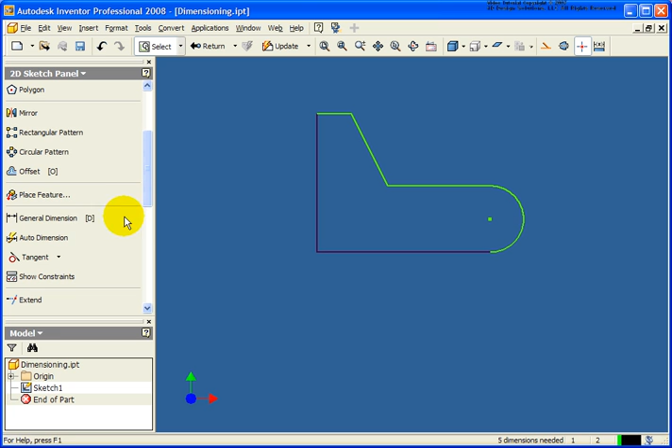In this lesson, we will be covering Autodesk Inventor's dimensioning capabilities in a 2D sketch environment. The file that I have open right now is the dimensioning.ipt file, also found in the Chapter 2 exercise file folder. With Autodesk Inventor, we're pretty much going to be working with a single dimensioning tool. As you can see here, it's called the General Dimension. The shortcut is the letter D. And those of you that have AutoCAD experience, you'll see a lot of similarities here.

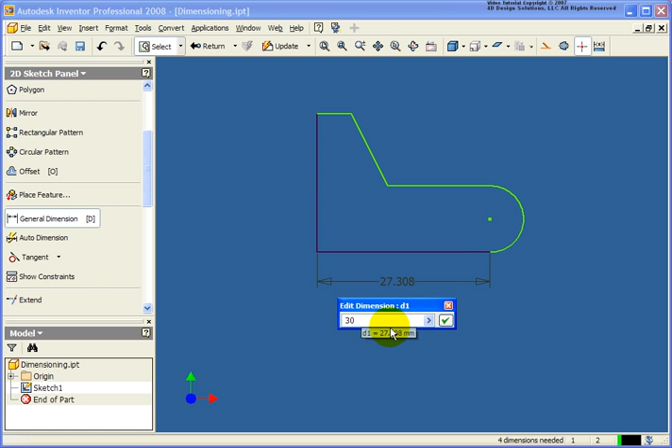I can simply select the edge and then pull my cursor down. And in this case, I will pick on a point to place that dimension. And then with the parametrics in place here, I can type in a value. Now, the dimension appeared after placing it for me to change it, and that's an application option.

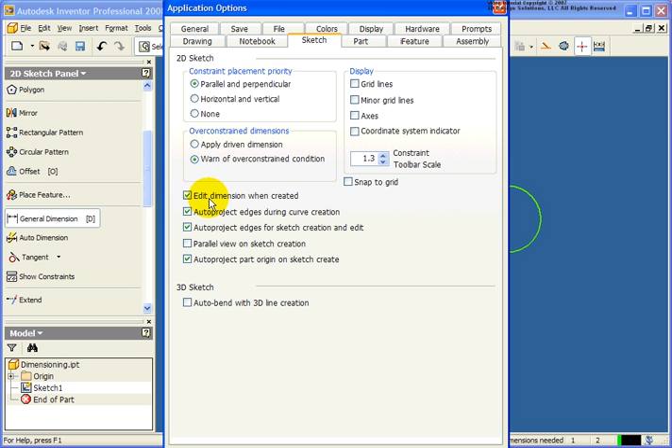Under the Sketch tab, the Edit Dimension when created, that's off by default. So in this case, that dialog box would not have popped back up. I would have had to double click on that dimension to change it. So I would suggest changing the option here to have that checked.

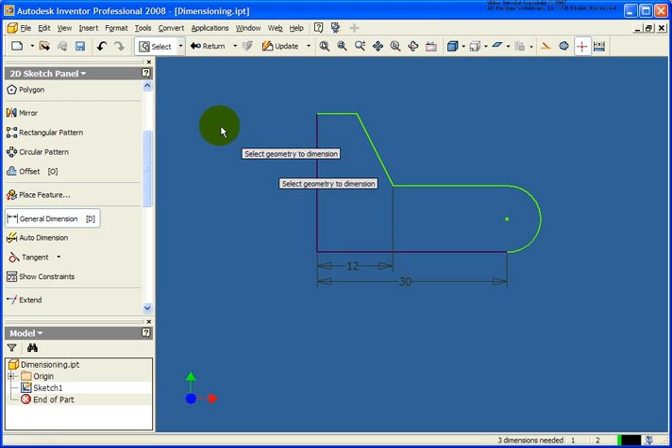Let's take a look at some of the other capabilities here with the General Dimension tool. You can also pick on points. But you'll notice what I'm not doing is I'm not having to use object snaps. Inventor is intelligent. It knows exactly what I want to do by selecting on those given points. So let me undo that one last time here. And let's pick those exact same points.

So just like AutoCAD, if I move my cursor to the left, to the right, to the bottom, Inventor's always suggesting what and where that location is going to be. So in this case, let's place that at 10.

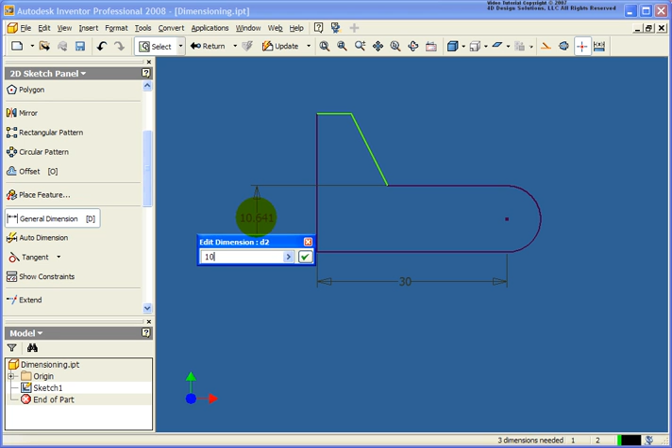So let's place another dimension. I want to place an aligned dimension. So if I select on the angle line that I have, and as I pull the cursor up or to the right, I'm getting horizontal and vertical dimensions. If I want an aligned dimension, I can either right-click and click on aligned, or I'm just going to hit the escape key and do that again and show another method here.

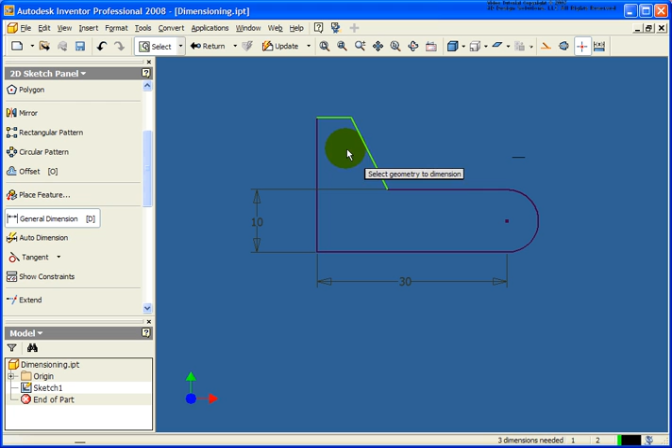If I again select on that angle line, you'll notice I'm getting horizontal and vertical. I'm going to select on that exact same line again to get the aligned dimension, so I can change that value to, in this case, say 14.

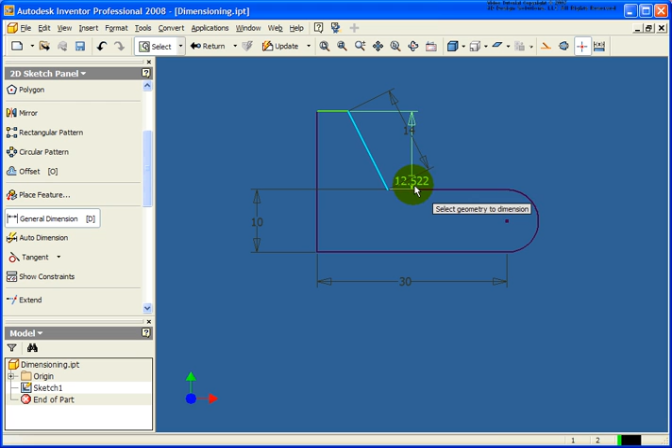To place in an angle dimension, I'm going to select two lines, and you'll notice here this is where a lot of people kind of get a little confused, because right now Inventor is displaying, in this case, a vertical dimension. But keep on moving the cursor down, and you'll see that the glyph changes, showing that if you pick on that, you're going to get an angle. So now, depending upon where I move my cursor, is how I'm going to define that angle. So in this case, I'll just put it right up here and change that to 120 degrees.

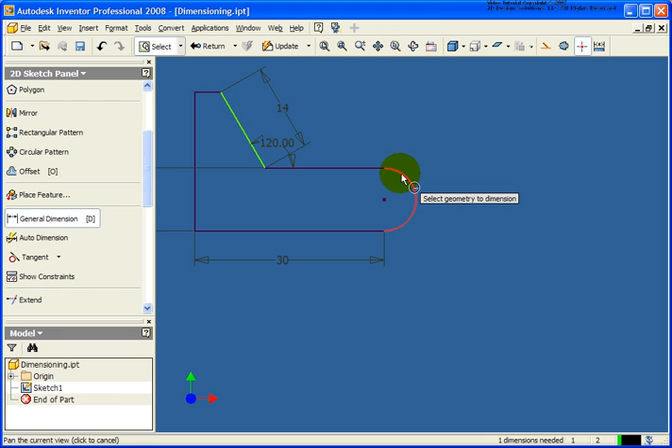To dimension an arc, in this case, I'm still in the same dimensioning tool. I'm going to select on the arc, and by default it will be a radius or a radial dimension. If I want that to be a diameter, I can right click and change that to diameter. So in this case, it's telling me that that dimension is already locked down by another value, so I'm going to go ahead and click on cancel there for a second.

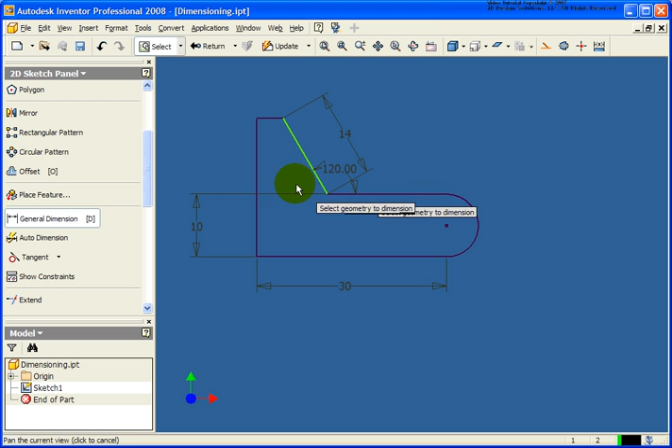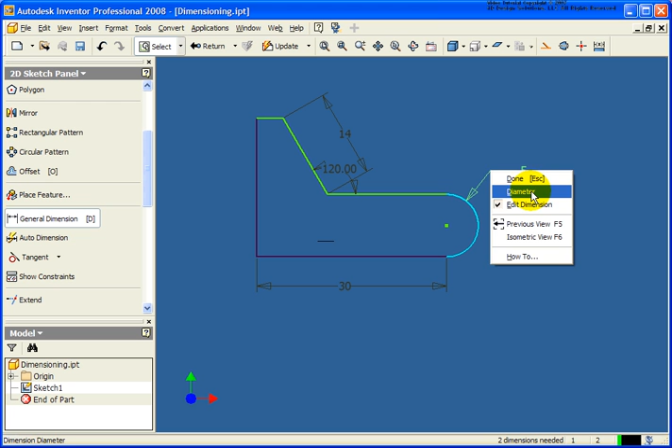And let's remove the 10 millimeter dimension that I had and just hit D from the keyboard and replace that dimension again. The key here with the menu, changing it from a radius to a diameter, that needs to be done before the dimension is placed. Once it is placed, you'll have to erase it and replace that. So in this case, if I really do want that to be a diameter, change that back to 12, and everything is good to go.

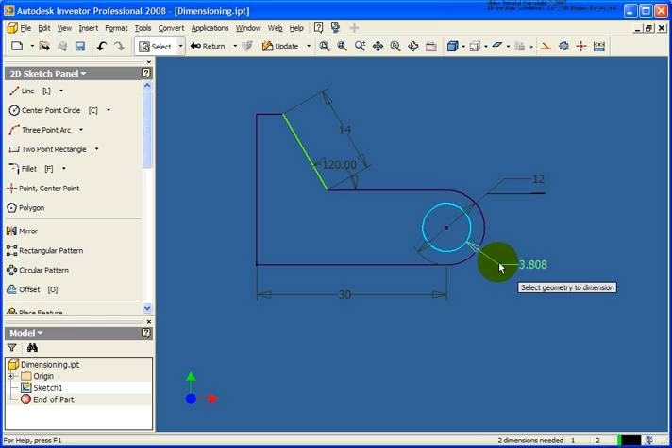Let's just quickly draw in a circle, create an island. And if I place in a dimension again, hitting D on the keyboard, you'll notice that the dimension for the circle will default to a diameter. And of course, I can right click and change that to a radius if I want to. So I'll change that back to diameter. Let's place in a value of 8. And the circle is dimensioned. So I'm going to go ahead and erase that dimension.

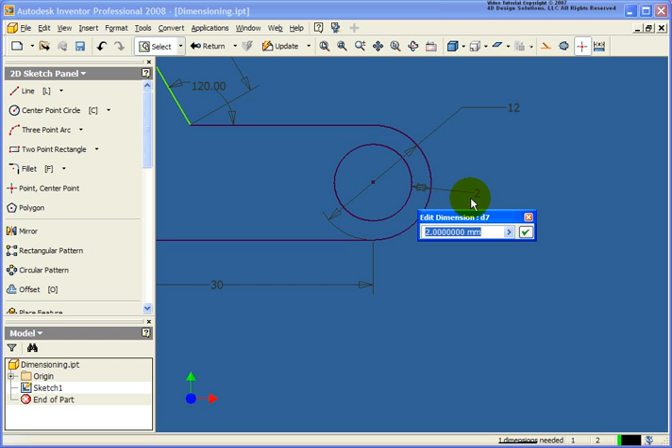Now, maybe I want to go back and I want to control the wall thickness between the arc and that circle. So again, I'm just going to hit D from the keyboard, select on the circle, select on that arc, and I'm now going to define the distance between both of those. Let's change that back to 3. So there's a whole bunch of different ways to go back and dimension out that geometry.

For the next dimension, I'm going to go ahead and erase out the 30. I'm just going to hit the escape key because I was already in that dimension tool. I'm just going to hit delete on the keyboard. And what I want to do in this case is I need to control the overall length from the left vertical line to the right quadrant in this case.

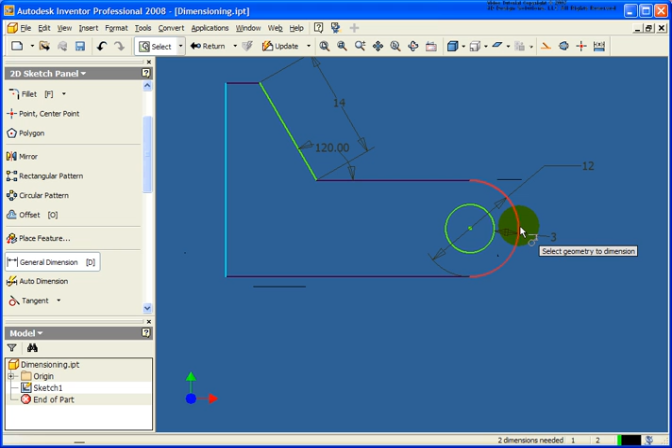So let's go select on our general dimension tool. And the key here is I'm going to select the left vertical line first. Moving the cursor, you'll see that the glyph will change. And as soon as it is showing me that the dimension right there is going to be to that quadrant, I'm going to pick on that and place in that dimension. Let's change the value to 40 to get the overall. So that worked really well.

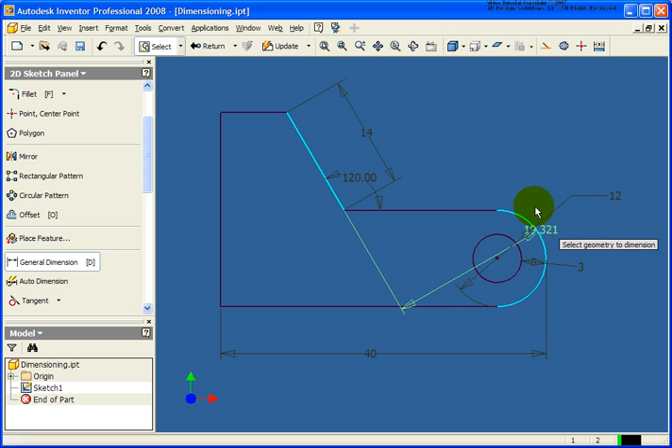Just keep in mind that I need to select the line first, and the dimension is going to be placed tangent to the line selected. So if I would have selected this angle line, I would get, let's actually do that. Let's select the angle line. Moving the cursor again until that glyph changes. And let's change that value to 20. So as you can see, there's a whole bunch of different ways to dimension those off. I'm going to undo that here for a second.

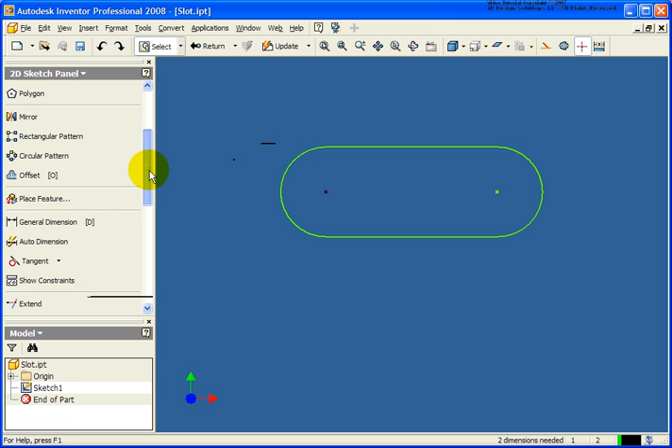And the next part I want to talk about here is I have another file called slot.ipt that is as well in the Chapter 2 folder. And I'm going to place in another dimension, but in this case, I want to dimension the overall length of the slot. So of course I could come back and just select on the arcs themselves or the center points and get the center to center distance, but that's not what I want, so I'm going to press the escape key. I'm going to select on the arc.

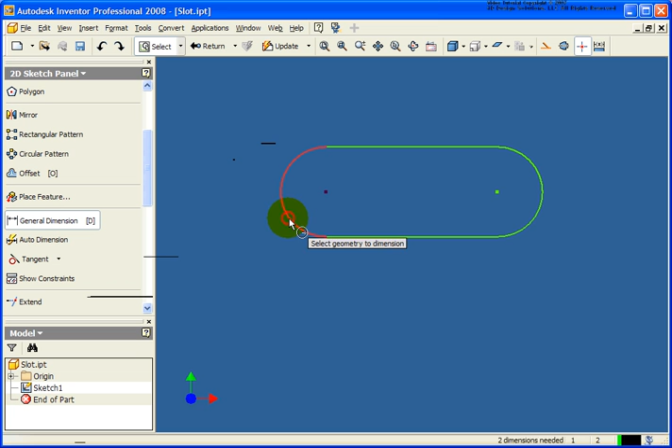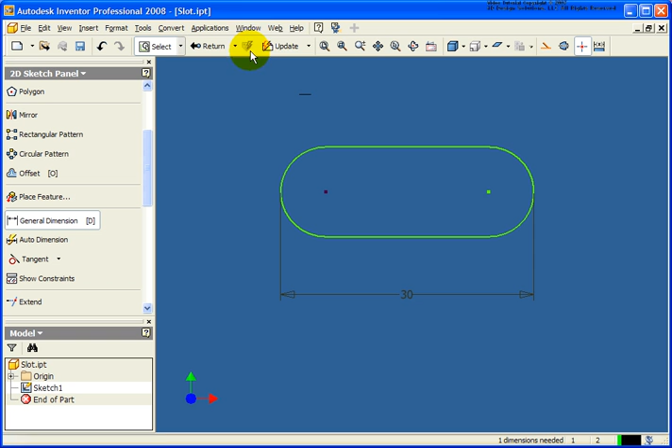I'm going to move the cursor to the right hand side, again until the glyph changes, showing me that it's going to go from tangency to tangency, or in this case quadrant to quadrant. Type in a value to get the overall distance. So fairly easy to do, so it didn't matter which arc I selected first or second. Let's go back to our previous drawing for a second.

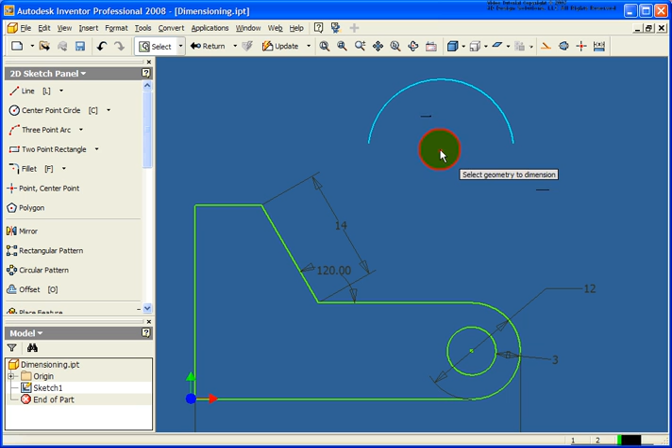For the next example here, I'm going to place in a 3-point arc. And with this 3-point arc, I'm also going to apply a horizontal constraint to the two endpoints to lock them down horizontally. But what I want to do is I want to control the angle between the arc here. So again, I'm just going to start up the dimension tool, select on the arc, select on the center, and now I can control the angle. So let's say I want that to be 150 degrees. So I just selected on the arc, and then I selected on the center point to dimension that.

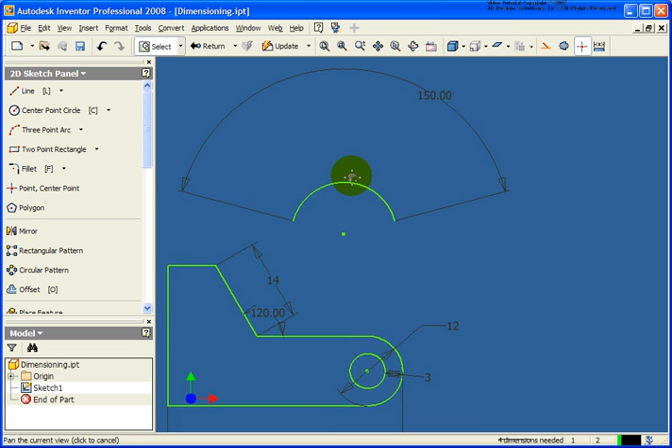Fairly easy to do. So let's draw in another 3-point arc. So in this case, again, if I start up the dimension tool, select on the arc, select on the center point, and being that the open area is less than 180 degrees, that is what I'm going to define here with the angle. So I could say I want that to be 60 degrees. And then of course I could come back later and apply a dimension or a constraint to lock that down if needed.

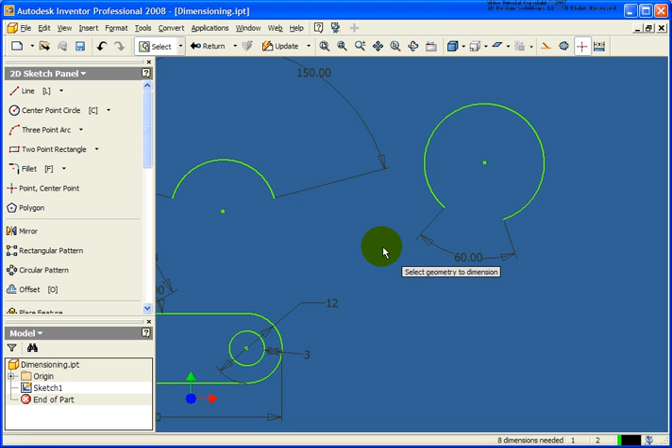Next, what we're going to do is we're going to start up a brand new part file. And for this next example, I'm going to draw in a few lines here to represent geometry that I want to revolve. So we'll just draw something in fairly simple.

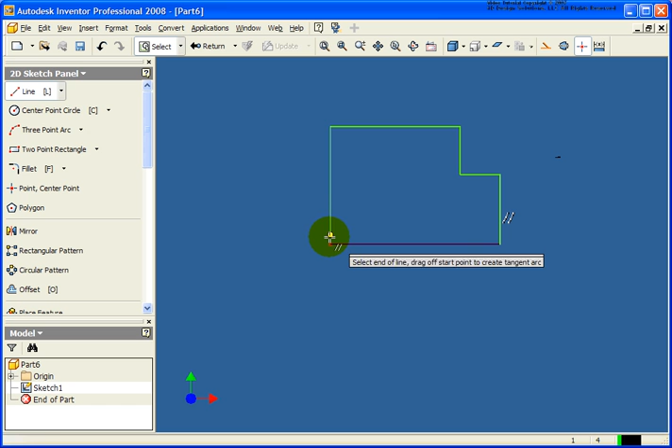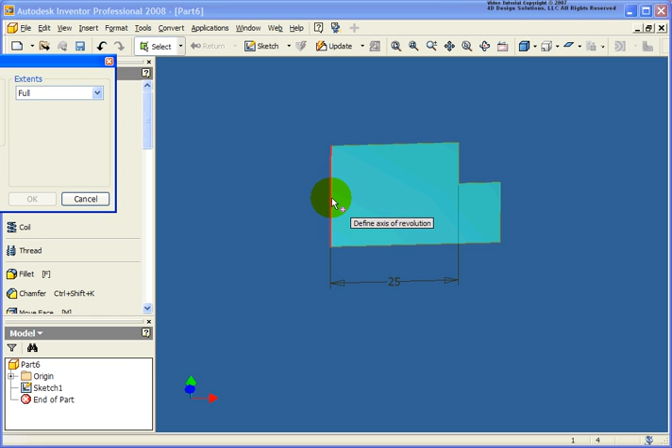And if I start up the general dimension tool, and if I place in a value, let's say 25 millimeters in this case, if I rotate the part, and I go back and do a revolve on this, you can see the issue with doing a revolve is that that 25 is a radial dimension, and probably what I really want to do is define that as 50 millimeters for the diameter.

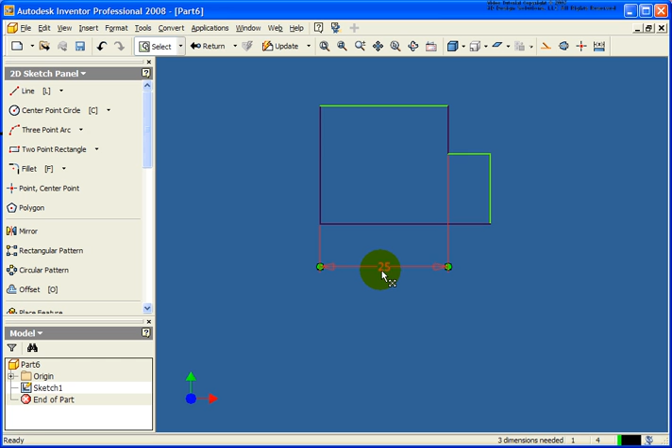So I'm going to undo that, look back at my sketch, make that active, and I'm going to erase out the 25 millimeter dimension. And I'm going to do general dimension. And the key here, what I'm going to do is I'm going to select the line that will actually be utilized to do the revolve, or the axis of rotation. So I'm going to select that line, and then either the other edge or a point.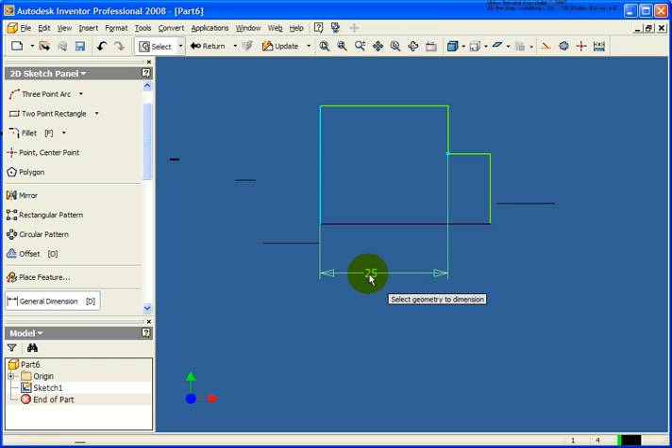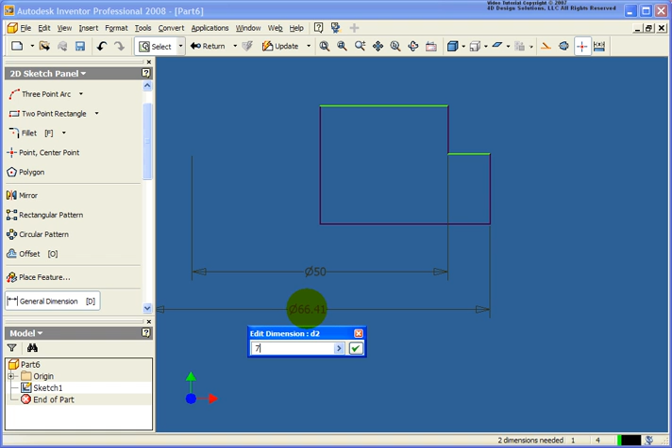And you notice at this point it's exactly the same, but now what I'm going to do is right click, change it to linear diameter. So it sees it now is twice the size that it was before. And again, you're just going to select the inside edge, right click, linear diameter, place that, give it a value to get exactly what I needed to do for that given sketch.

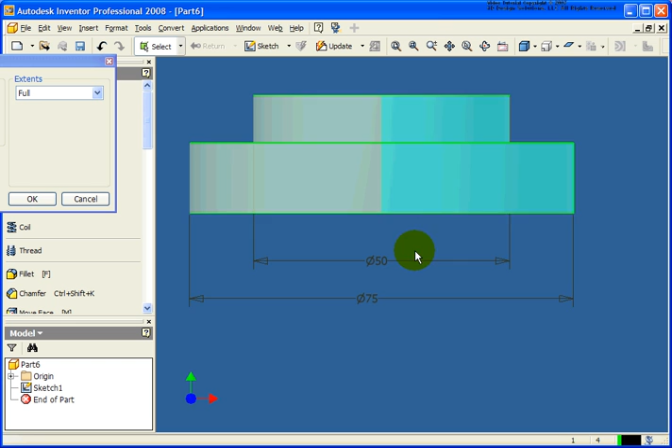So now when I rotate this, and let's revolve the sketch, the dimensions are exactly in line with the diameter that I was looking for. Let's cancel that. I'm going to erase those two lines. So that works well if you have the edge right in the part that you're going to revolve around.

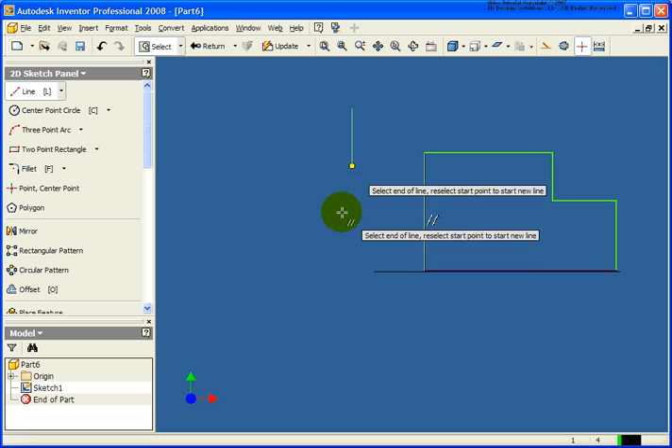But in this case, I want to take it off of a center line. So I'm going to draw in another line segment that I want to revolve around. That's not necessarily right on that part. And I'm going to select on that, and I'm going to change its style to a center line. Now with that center line, Inventor is going to understand that there's something different going on here.

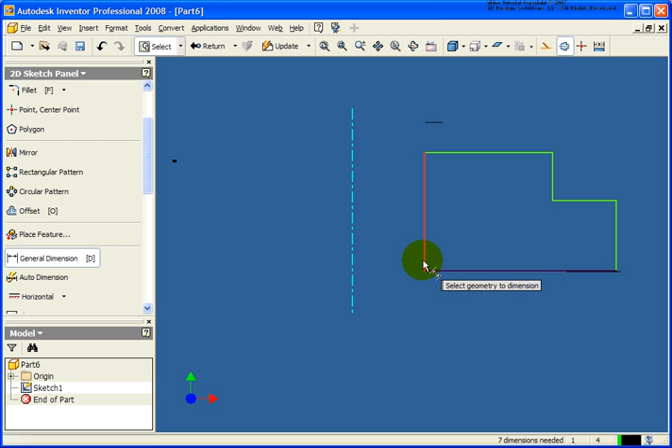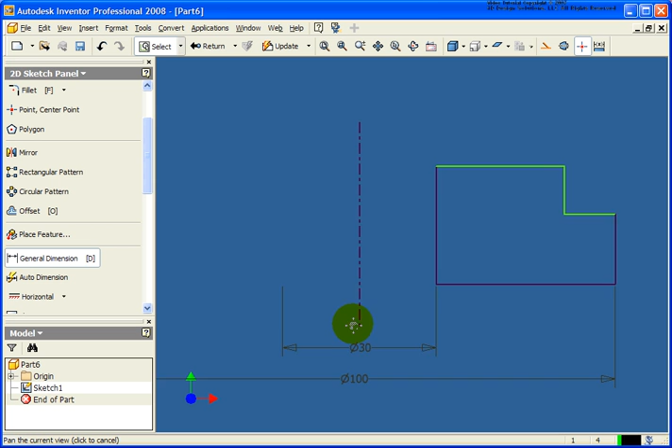So what I'm going to do is select the center line, and again the edge or a point, and it will automatically default to that linear diameter for me. As you'll see, if I right click, linear diameter is the default, which makes it a lot easier to do. Change that to 100. So that makes it very quick, very easy to do.

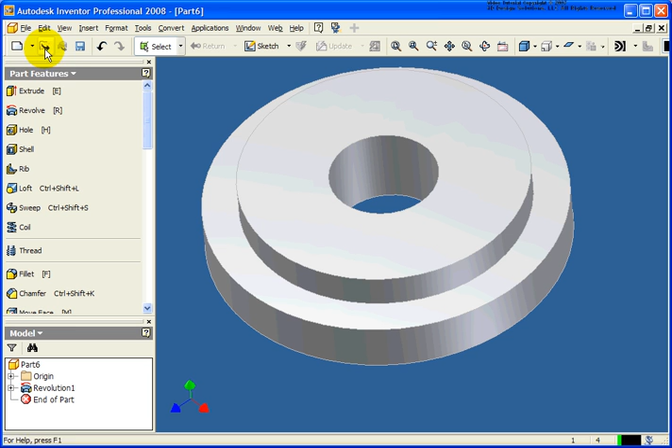So let's just revolve that just to show you what the finished part will actually look like. In this case, spin it around to see the top. One last topic to talk about when placing in dimensions. I'm going to start up a brand new part file. I'm going to draw in a rectangle.

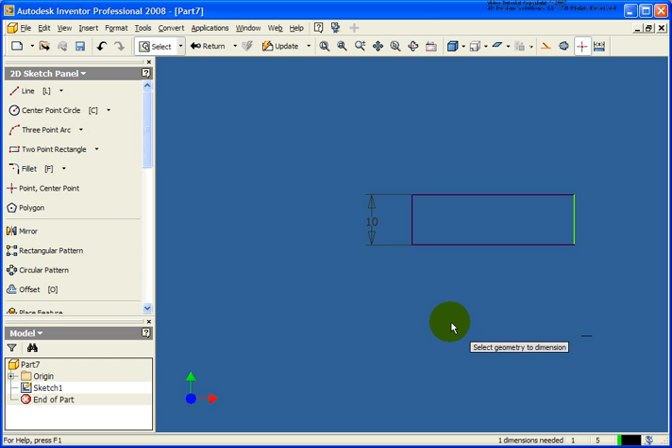I'm going to hit D, my shortcut key. I'm going to place in two dimensions, a horizontal and a vertical. And you'll notice the number of dimensions that are required to fully constrain it is being decreased with each dimension that I place. So everything is fully constrained, but by accident, if you happen to place in another dimension here, Inventor will not allow you to over-constrain the sketch.

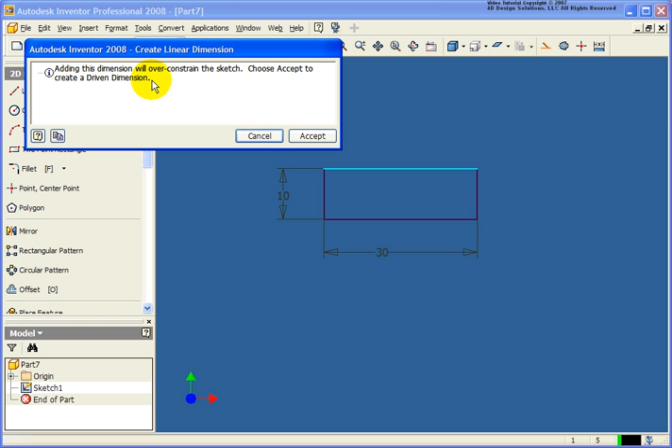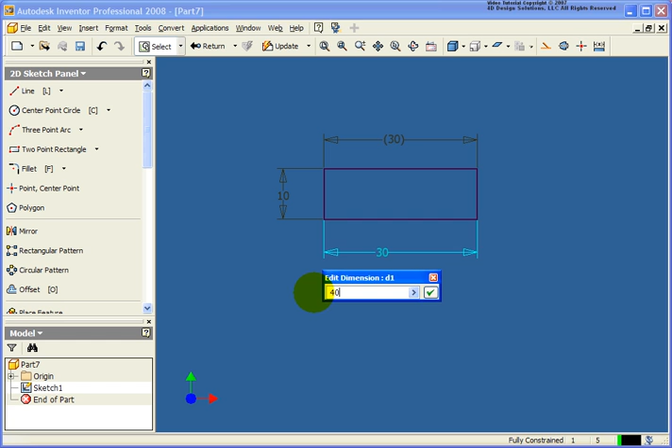So the default here is the dialog box is going to pop up, and it's allowing me to accept or cancel. If I hit cancel, nothing's going to happen. If I place that same dimension, and if I accept the value, it's going to go in as a driven dimension. As you see, it's grayed out. I cannot type in there. It's along for the ride. It's kind of like an AutoCAD associative dimension. So if I double click on the bottom horizontal, change that to 40, the top one will change.

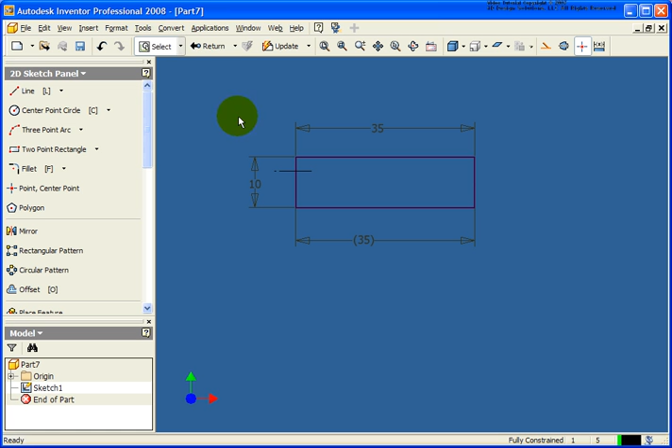Now you can also change this. So I can select on my driving dimension right now, the parametric dimension, come back up on the standard toolbar and say that is now going to be a driven dimension. And I'm going to reverse that for the top one. So now I can pick on that top value and say, well, change it back to 35, and the other one will change. So there's an option under the Tools, Application Options.